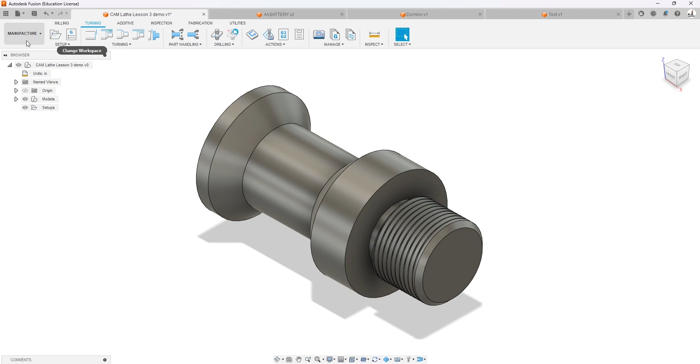So I've gone ahead and moved into manufacturing. So first step always is the setup. So we're going to click on setup. Now this part is exactly 1.5 inches in diameter. We can't obviously cut an exact 1.5 inch diameter out of exactly 1.5 inch stock, so we're gonna have to go to the next size bigger, which is 2 inch.

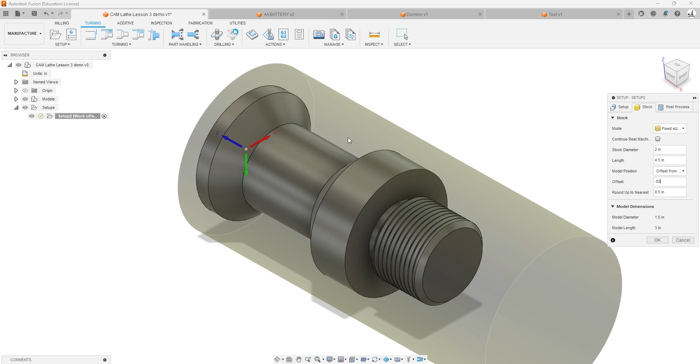I like to start on the stock page. So we're gonna change the diameter to 2, and the length is going to be 4.5. And we are gonna offset this from the front, and we are gonna leave 20 thousandths gap. Now this is the wrong front. We want the front over here, not over there, but we'll fix that in a moment. So we're going to switch over to the setup, and we're going to switch the front by selecting flip Z, and the Z will come over here.

Now the stock is 4.5 inches long. We want about an inch actually in the chuck. So you can see we've offset it 0.4 from the back. We want to get this up to 3.5 because that corresponds with our G57 offset. So we're going to make some adjustments to this back of the stock. So it looks like I need to add about 80 thou.

So I'm going to go minus 0.8, negative 0.8. There we go. Oops, that's too much. What did I do wrong there? Let's go negative 0.4 minus. There we go. I think I put 800 that way. So we are now exactly at 3.5 from the front, which corresponds to one of our preset work offsets in the machine to hold on to this stock. So we're going to have 1 inch held in the chuck.

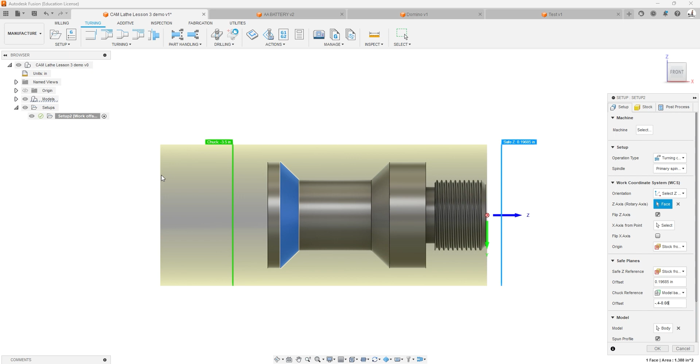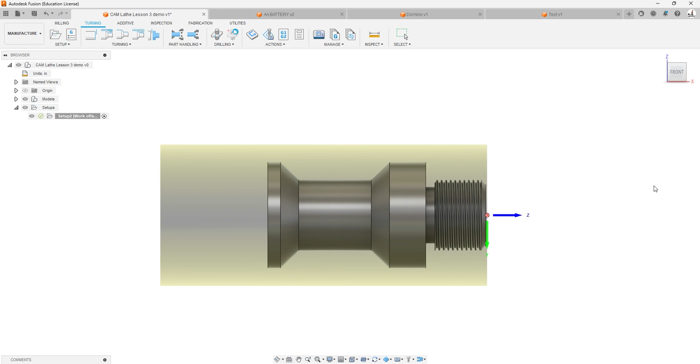And then we're going to hop over here to the program number. This is 26,031, and we're going to call this OP1 for CAM lathe lesson 3. And then our work offset is going to be number 4, which should allow the material to stick out 3.5 inches from the face of the chuck. So we're going to click OK. And now we're going to move on to our operations.

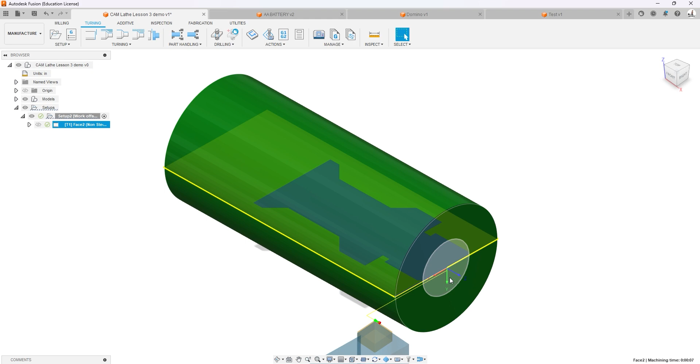Our first operation is we're going to face this, then we're going to do a rough profiling. So we're going to do those rather quickly. We've done this numerous times before. So we're going to select from our demo library the standard facing turning tool, and we're going to hit OK, and it's going to automatically put our face on. And then we're going to do an adaptive removal or rough turning. We're going to use the same tool.

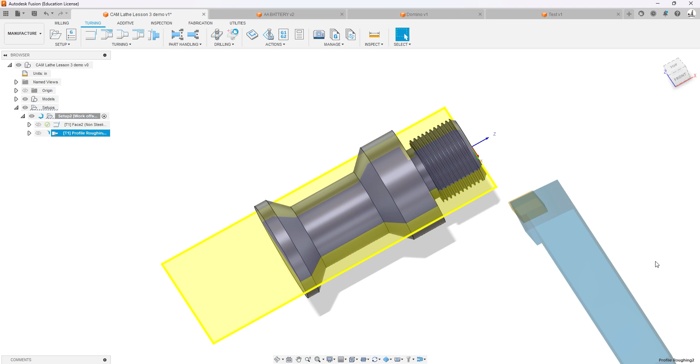The only thing we're going to change is we're going to add about 150 thou on the back, so when we do our parting, we would have a flat surface to part. So from the back, we're in a negative 150 thou. Gives us some space to get that parting tool down in there, and we click OK, and you can see that it is producing this shape. Obviously the geometry of the cutter is what's affecting the ability to cut the shape we want, and it's kind of doing the best it can in this roughing cycle, which is fine.

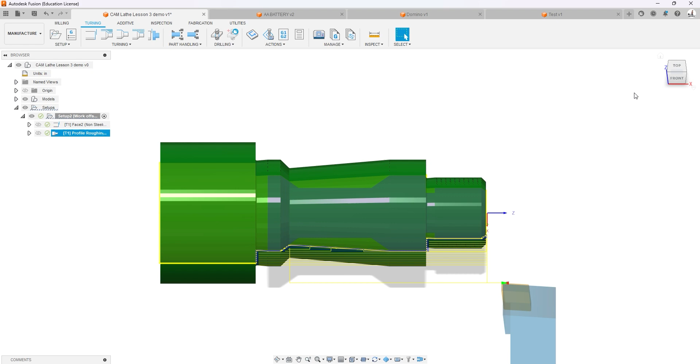Now this part of the lesson here is to learn how to do shapes like this. Now, in order to get this down, we are going to use a grooving cycle, and the grooving tool will come in and remove most of this material. So this is one strategy. So here is a groove turning. We have to switch tools to a grooving tool, which is our tool number 2 in our tool library.

And then we want to make an adjustment. We only want it to groove in the area where we need it. So we only need it between this taper and this taper. So our front, we're going to move to selection and select that ring. And our back, we're going to move to selection and we're going to select this ring. Now it's only going to work between these two.

Now we want to make a final finish pass with a right hand tool. So we are going to do stock to leave, and we're going to leave 6 thou on all surfaces. So if we go ahead and click OK, you'll see that it comes in and it does this grooving operation in order for us to do this. So one problem.

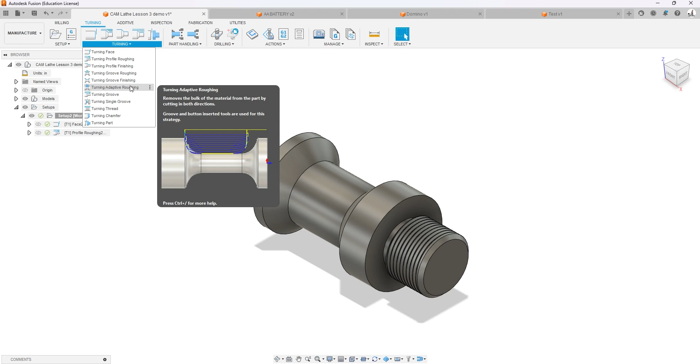Okay, so we are going to next do a rough grooving operation. Here it is: turning, grooving, roughing. We want to remove the material here that was left in the first operation. So we are going to first limit the area we want to do the grooving in, because it'll try to groove the whole thing. We want to put it between this edge and this edge, using selection, to limit where the grooving goes.

And then our maximum step over, we want to increase this to about 0.1. Our groover is 0.125, so we're not going to use the whole thing, and we're going to leave 6 thousandths on the bottom. We need to select our tool, which is our grooving tool, which I forgot to do. And there is our grooving. So if we go ahead and simulate this, we'll see that it comes in and it's going to produce this kind of step down look.

Now if we simulate this, we're going to see that it's going to go in and make the grooves, which is what we want, but then it's going to do this side-to-side cutting. Not all parting grooving tools are designed to allow the cutter to move in any direction but X. So how would we turn that off?

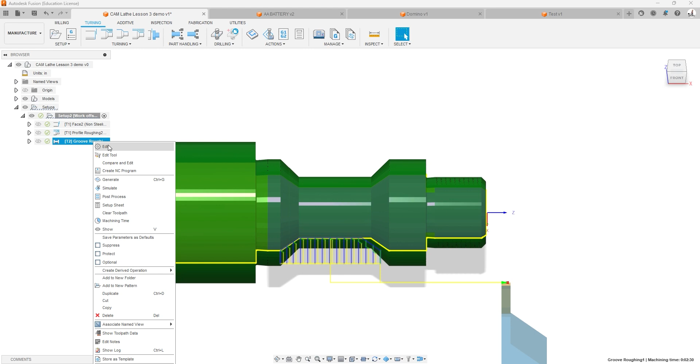We would turn that off by coming over here, going to edit, and under passes we would turn off this semi-finish pass, and that will produce just a stepped look. And because we're going to come back with a right hand tool, we will be able to clean this up. So we remove most of the material, and we're now prepared to do the next few steps. But before we move away from the grooving tool, we are going to exit the simulation.

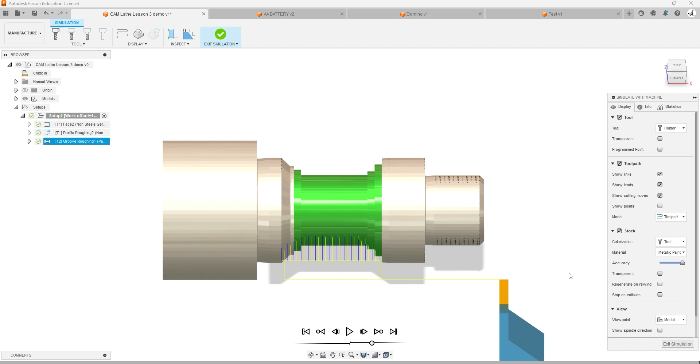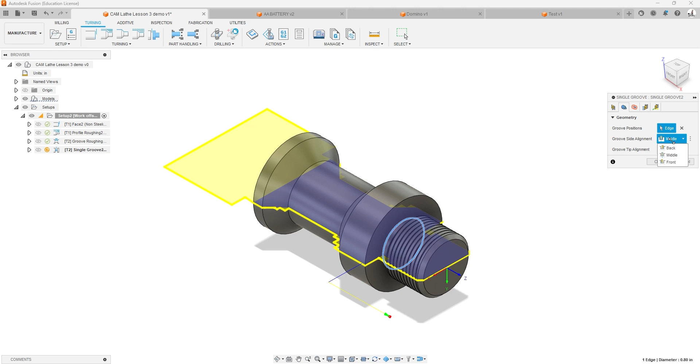We need to do a single groove over here for what's called the threading gutter. Basically, when we do the threading, we need a spot where the tool can stop and not cause any damage. So we're going to use a single groove here, and we're going to select that ring right there. We're going to offset it from the front, click OK, and it's going to be able to go in there and do that.

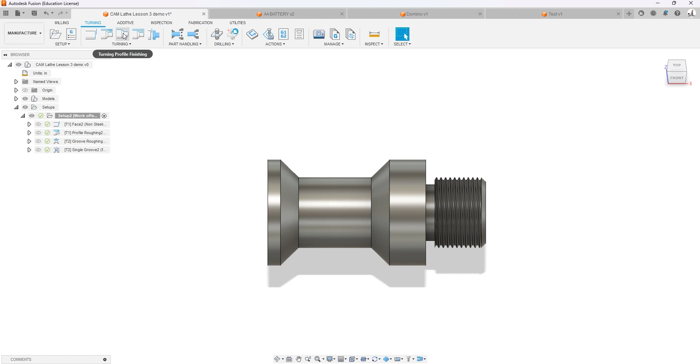We're doing this right now because we have this tool loaded up in the machine. We don't want to have extra tool changes if possible. So we have that done. The next thing we're going to do is switch to our right hand cutter. So we are going to do a finish profile. We're going to end up doing 2 of these.

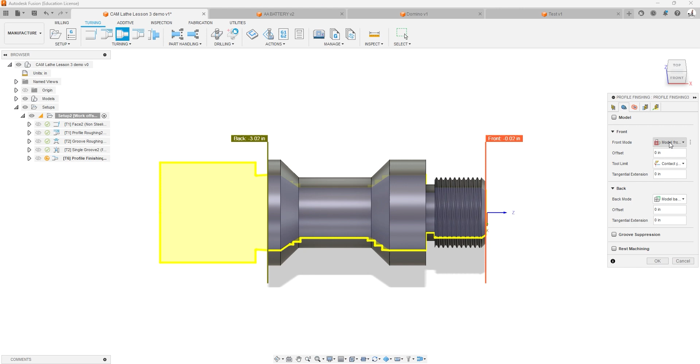We're going to do a finish profile, and we're going to use the right hand cutter, which is this right hand facing tool. You'll notice it kind of goes the other direction. And we are going to then limit our areas. We only want to go from the back to this front. We don't want to go over here to where the threading occurs. So on our front, we're going to select selection and choose this front ring, and we're going to go ahead and hit OK.

Oh, and I made a mistake. I forgot to adjust the direction it goes. So from our passes, direction, we can do front to back. We are going to actually do back to front, and click OK. This will allow the geometry of the cutter to work a little bit to our advantage.

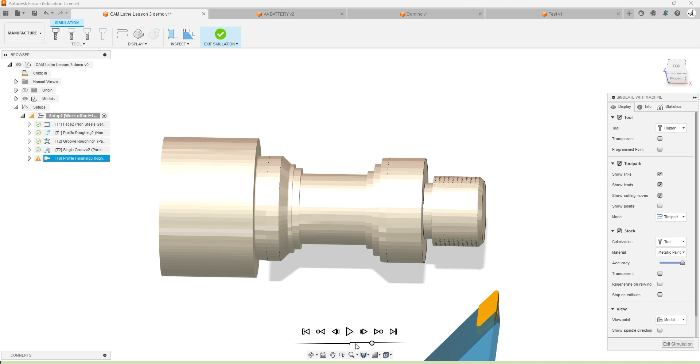If we simulate, it's going to come in, go down, and come out this way. And you'll notice that we nicked right here during that operation, which is something we do not want to have happen. So to fix that, we have to go back up here to our profile, and we are going to increase the offset off the back here to negative, let's just add 0.25.

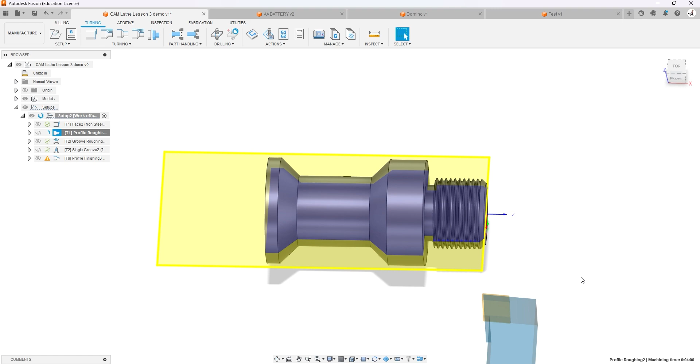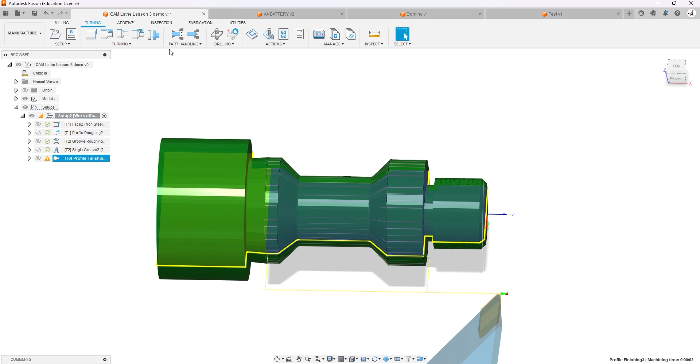And now if we do our finishing profile, you'll notice that we didn't hit this time by adding that distance. But we've now finish turned this, and we only need to do the threading. So we're going to do another contour, but we are going to switch back to tool number 1.

And we are now going to only do, by limiting our geometry, the first part of it. So we are going to set the back to here and click OK. And this should cut our final pass. Now we're actually going to do this twice, because we are going to use this one as a finish pass after the threading. So our last step is to do threading.

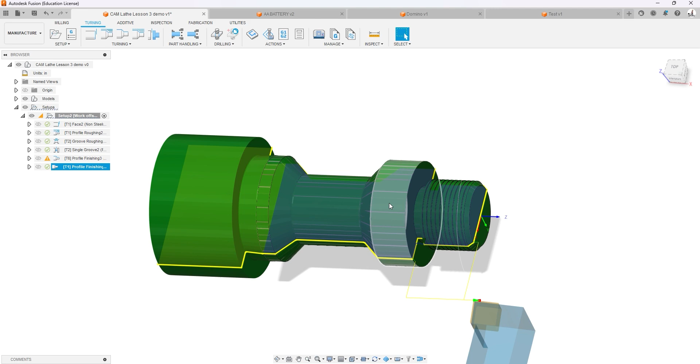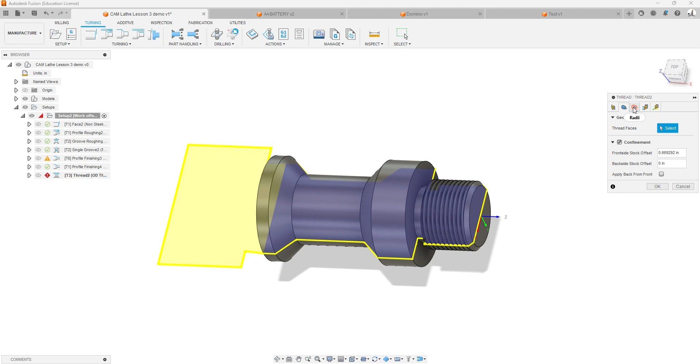So we're going to go over here to threading, turn threading. We've got to switch to our threading tool, which is our tool number 3, OD threading tool. And we are going to make sure that we are selecting the proper areas. So our threading area is going to be, select the face. It's this threading face we need to select. Now I had made a mistake, so I'm going to click OK real quick.

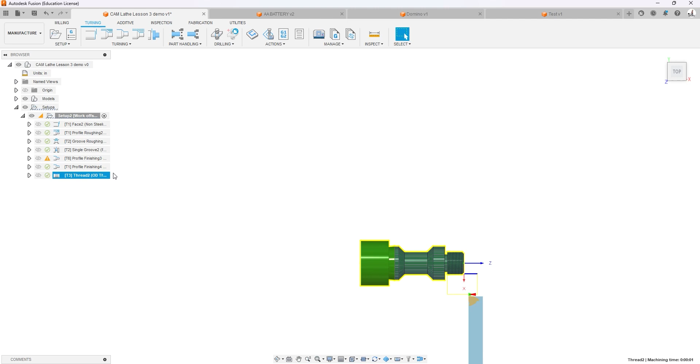One thing I want you to notice real quick is I forgot on the tool, this is a rounded bottom tool. We want a pointed one, so we actually need to go into the tool and edit the tool. And under inserts, where it says round, we have to make that pointed. And that's going to make it a sharp point as opposed to a rounded point when I hit accept. So that's going to help us with this.

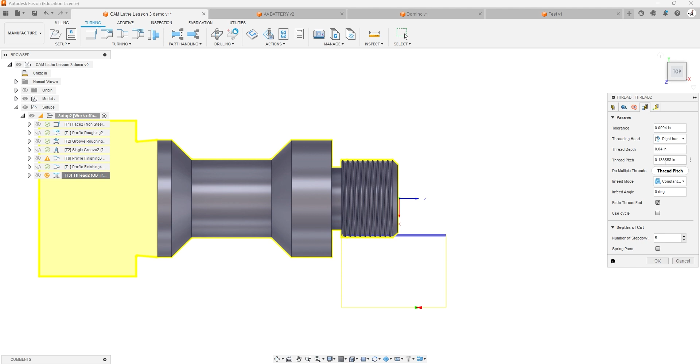Now this is 16 threads per inch on a 1 inch diameter. So we need to actually go in here and make sure that under the, where is it? Pitch. Under the pitch here, we have to make sure we set it to the right amount. And the easiest way is to just take 1 divided by 16. And that should, if we press enter, give us the proper pitch, which is 1/16 of an inch.

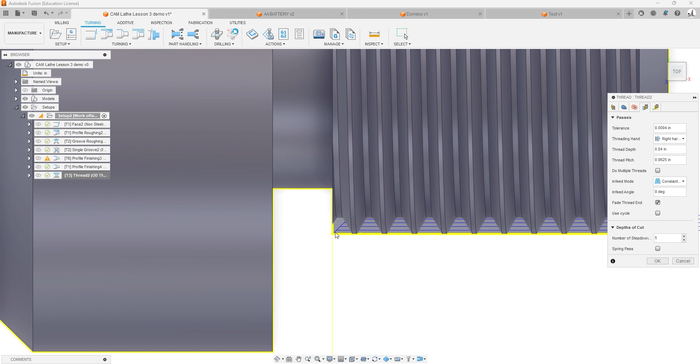Okay, now the one thing we have to do is you'll notice that the lines are stopping short of the end of our cycle. So we actually have to push it deeper into that threading trough. So offset from the back is going to be 0.08 or 80 thousandths, and we can click OK. And now this will lag because threading is a very challenging thing for the computer to simulate.

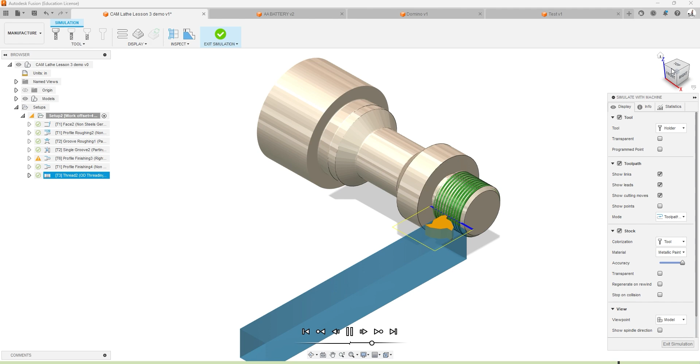But when I simulate this, we hit play, it's going to produce the threads. And what we're looking for is any red errors where it hits this wall, which is not what we're getting. Also, when you zoom in on the graphics, often there'll be problems because the drawing and the threading don't line up, and that's not really unexpected. So this is how we would do single point threading for a part.

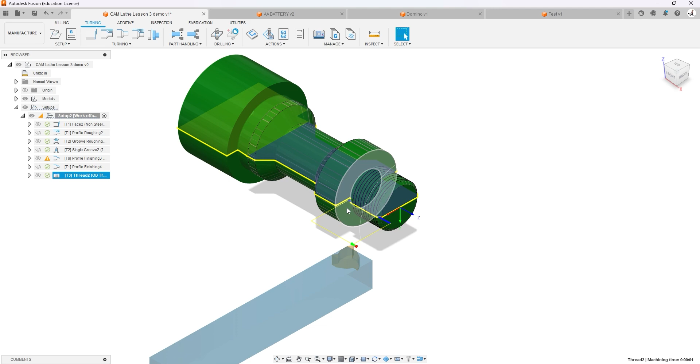Now normally we would finish this part by parting it off, but because the parting tool in our tool library will not part to this depth, we're going to just leave it attached, and this is the end of this lesson. I've shown you in previous lessons how to do parting off.

Now you notice we have an error, and if we hover over there, it just says, hey, by the way, I modified the lead-in in this case, due to gouging with the remaining stock. So it recognized this problem over here after we cleaned it up, and said, okay, I made some changes to the approach angles in order for us to still cut what you wish without hitting this stock. And I'm just warning you of that. If it's red, it won't work. Yellow is saying, hey, I saw a mistake and I corrected it, but I wanted to let you know.

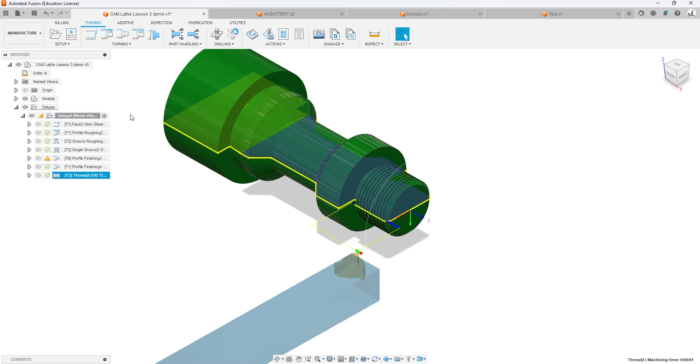So that's how we do CAM lathe lesson number 3. And then from this, you should be able to do the tic-tac-toe foot, because the only difference between this and the tic-tac-toe foot is the size of the part.